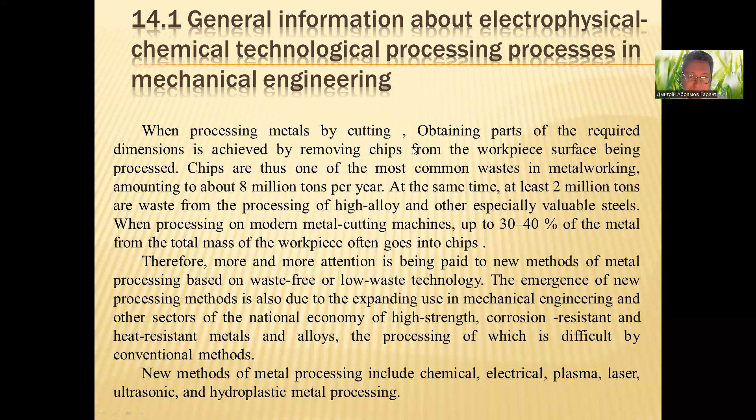A decisive role in accelerating technical progress in mechanical engineering belongs to new progressive technological processes that can dramatically increase labor productivity, reduce labor intensity, and increase the reliability and durability of products.

In the practice of metalworking, electrophysical and electrochemical methods are beginning to occupy one of the leading places. The share of technological operations performed by these methods in the total volume does not yet exceed 1%.

However, their use has made it possible to significantly reduce the difficulties of introducing hard alloys, facilitate the transition to the widespread use of difficult-to-process materials, including non-metallic ones, and solve a number of complex technological processes associated with the production of products from materials that have not previously been processed.

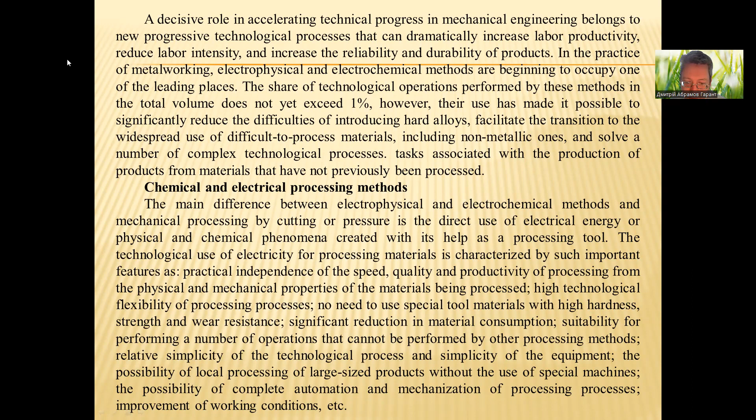Progressive processing methods can be divided into two groups. The first includes methods used to remove material from treated surfaces, transfer it, and shape it using electrical energy introduced directly into the treatment area. These are electroerosive, electric spark, electric pulse, electric contact, anodic mechanical processing, and electrochemical methods.

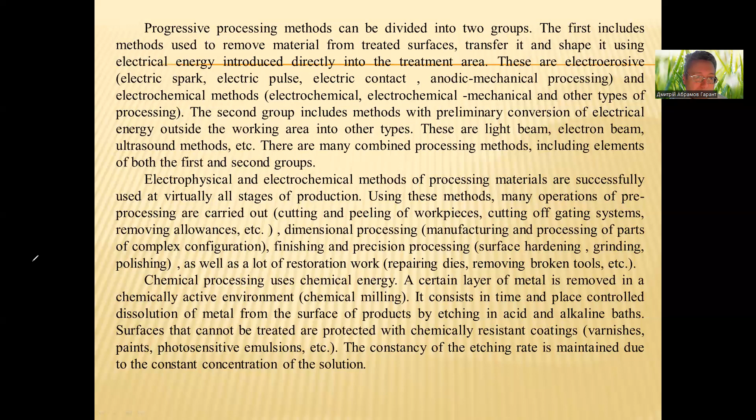Using chemical processing methods, local thinning is obtained on non-rigid workpieces, stiffening ribs, winding grooves, and crevices, waffle surfaces, and surfaces that are difficult to reach with cutting tools.

With the electrical method, electrical energy is converted into thermal, chemical, and other types of energy directly in the process of removing a given layer. In accordance with this, electrical processing methods are divided into electrochemical, electroerosive, electrothermal, and electromechanical.

Electrical processing methods: first, electrochemical processing, is based on the laws of anodic dissolution of metal during electrolysis. When a direct electric current passes through the electrolyte, a chemical reaction occurs on the surface of the workpiece, which is connected to the electrical circuit and serves as the anode, and compounds are formed that go into solution or are easily removed mechanically.

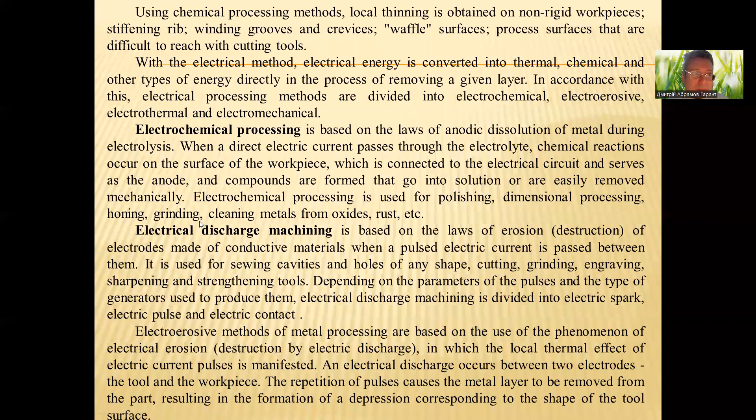Electric spark machining of metals is used for processing hardened steels and hard alloys, drilling holes of small diameters in millimeters, production of profile narrow grooves and groove-shaped internal cavities in dies, molds, and cutting tools, blind holes in taps and removal of drills after breakage from expensive parts, cutting workpieces, etc.

The process is carried out on special machines, as shown in figure 14.1. You can see the scheme of electric spark processing of metals. The special machine is equipped with electric current pulse generators.

The pulse generator consists of a direct current generator G, resistance K, and capacitor C, and contains this capacitor C.

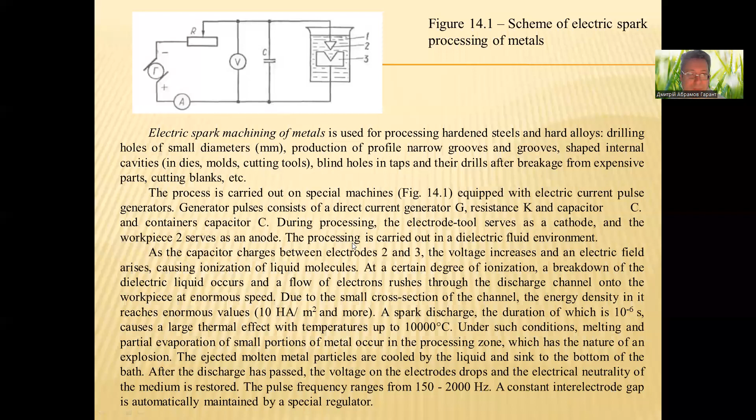Tool electrodes are made of copper, brass, cast iron, aluminum, and in some cases tungsten. Mineral oil, kerosene, distilled water, and other dielectric liquids are used as dielectric fluids. Accuracy during electrical discharge machining of holes reaches plus minus 0.01 millimeters. Surface roughness is 6-7 classes.

The disadvantages of the electric spark method include relatively low productivity - when processing steel, metal removal reaches 0.8-0.9 centimeters cubed per minute - and high energy intensity, 36 to 252 megajoules, 10 to 70 kilowatt-hours per 1 kilogram of removed metal, and high consumption of electrodes. The use of electrodes made of graphite and copper-tungsten compositions results in a significant reduction in electrode consumption and an increase in productivity.

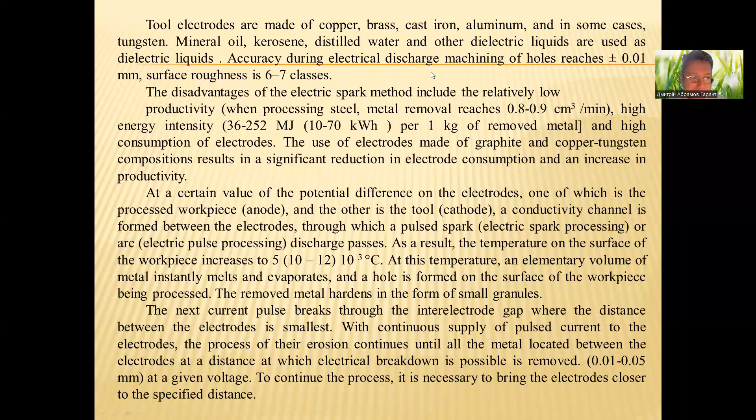With continuous supply of pulsed current to the electrodes, the process of erosion continues until all the metal located between the electrodes at a distance at which electrical breakdown is possible - 0.01 to 0.05 millimeters at a given voltage - is removed. To continue the process, it is necessary to bring the electrodes closer to the specified distance. This is done automatically using a tracking device of one type or another.

Electric spark processing is used for the manufacture of stamps, molds, dies, cutting tools, parts of internal combustion engines, meshes, and to strengthen the surface layer of parts.

Electric pulse processing is used as a preliminary treatment for dies, turbine blades, and surfaces of shaped holes in parts made of heat-resistant steels. With electric pulse processing, the metal removal rate is 8-10 times higher than with electric spark processing.

The electric pulse methods of metal processing arose from the improvement of the electric spark method. When processing with this method, the part is connected to the negative pole of the power source, and the tool is connected to the positive pole. The main influence on the treated surfaces is exerted by positively charged ions.

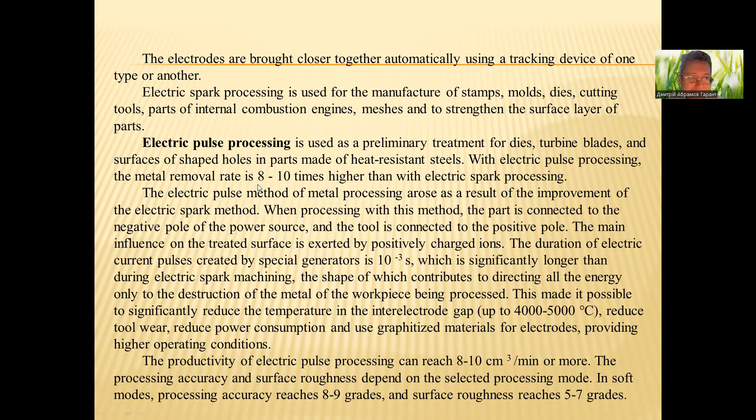It is advisable to use electric pulse processing when simultaneously removing metal from relatively large areas in black processing, since in this case the productivity of the process sharply increases.

Providing translation or rotation motion to the electrodes during electric spark and electric pulse processing makes it possible to reduce the manufacturing time of parts by 1.5-2 times, due to an increase in lateral clearances and easier evacuation of erosion products from the inter-electrode clearance.

Recently, high-frequency electric pulse processing has become widespread. It allows you to process parts to class 9 surface roughness with a productivity 30 to 50 times greater, which exceeds the productivity of the finishing modes of the electric spark method.

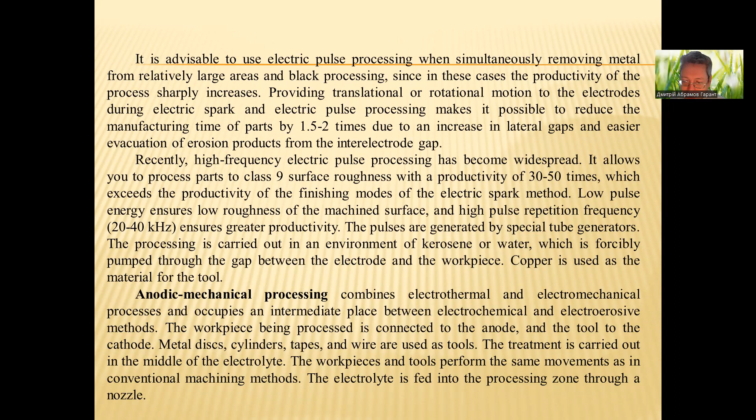Metal discs, cylinders, tapes, and wire are used as tools. The treatment is carried out in the medium of the electrolyte. The workpiece and tool perform the same movements as in conventional machining methods. The electrolyte is fed into the processing zone through a nozzle.

When a direct electric current is passed through the electrolyte solution, the process of anodic dissolution of the metal occurs as electrochemical processing. When the tool, the cathode, touches the micro roughness of the workpiece surface being processed, the anode, the process of electrical erosion, characteristic of electric spark machining, occurs.

Products of electrical erosion and anodic dissolution are removed from the processing zone when the tool and workpiece move. The process of anodic mechanical processing of metals is based on electrochemical and electrical erosion destruction of metal. It is used for cutting hard materials, sharpening carbide cutters, cutting shaped grooves, grinding flat and cylindrical surfaces, etc.

The anodic mechanical treatment scheme is similar to the electrical contact scheme. The process is carried out in an electrolyte environment, an aqueous solution of liquid glass or salts.

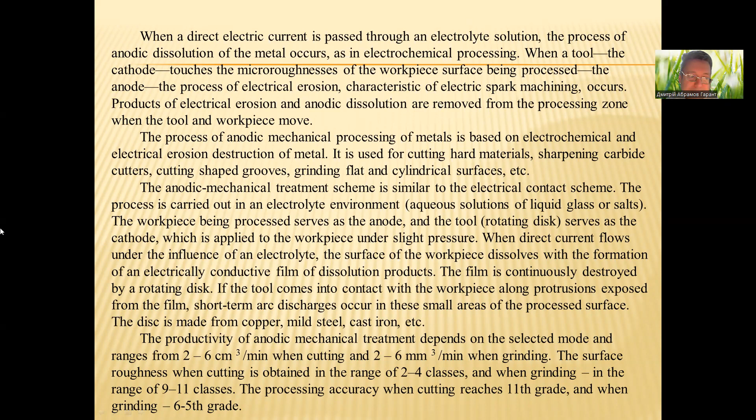Next type of processing, electrical contact processing of metals, consists in the fact that when the electrode tool is quickly moved, rotated relative to the workpiece being processed, connected to an alternating or direct current source, short-term arc discharges are formed at the moments of contact. As a result, the surface layer of metal is heated, melted, and removed by a rotating tool.

The process is carried out in an environment of mineral oil, water, or air at a voltage of from 2 to 20 volts and slight pressure from one electrode to another.

The electric contact method is effective when performing rough operations, cutting, stripping castings, descaling, etc. It provides processing accuracy of 11-12 grades and surface roughness of 1-2 grades. A steel disc is used as a tool for peeling and cutting, and a metal brush is used for cleaning.

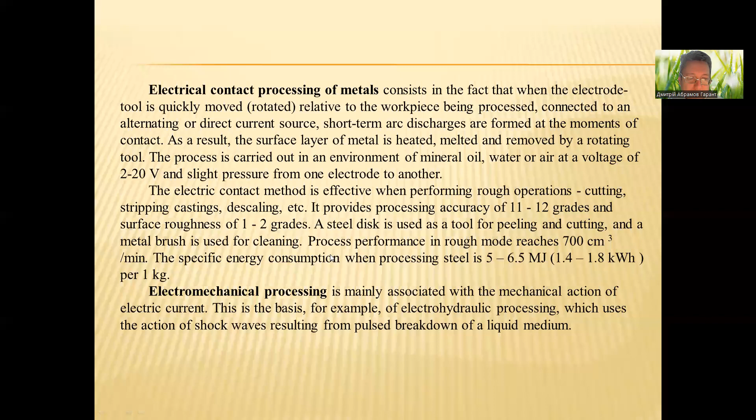Hydroplastic processing of metals: the production of metal hollow parts with a smooth surface and small tolerances. Hydraulic power cylinders, plungers, housings for electric motors, carriage axles, some gears, is increasingly being done in recent years, not by removing chips, but using so-called hydroplastic processing.

A hollow cylindrical blank or workpiece, heated to the temperature of plastic deformation, is placed in a massive split matrix made according to the shape of the part being processed, and water is pumped under pressure. The workpiece or blank is distributed and takes the form of the matrix.

To manufacture, for example, a carriage axle, a pressure of 150 megapascal is required. Therefore, the analyzed method does not allow the production of parts of significant size, for example, pipes.

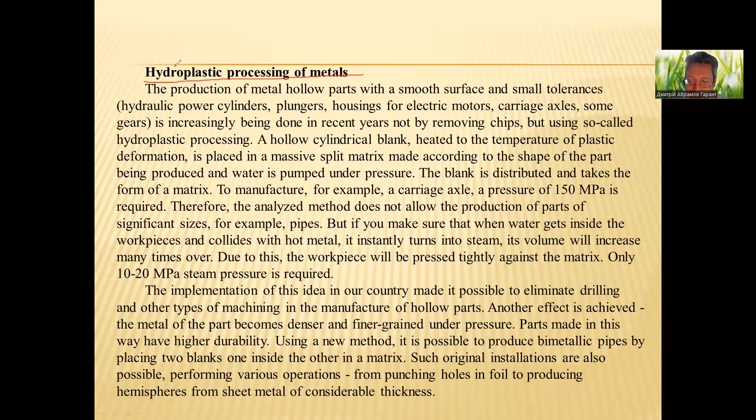Parts made in this way have higher durability. Using this new method, it is possible to produce bimetallic pipes by placing two blanks, one inside the other, in a matrix. Such original installations are also possible, performing various operations from punching holes in foil to production of hemispheres from sheet metal of considerable thickness.

Ultrasonic processing of metals, a type of mechanical processing, is based on the destruction of the material being processed by abrasive grains under the impact of an oscillating tool with an ultrasonic frequency. The energy source is electrosonic current generators with a frequency of 16-30 kHz.

The working tool, the punch, is fixed on the waveguide of the current generator. A workpiece is placed under the punch and a suspension consisting of water and abrasive material enters the processing zone.

The processing process consists of a tool oscillating at an ultrasonic frequency that strikes abrasive grains lying on the surface being processed, which chip off particles of the workpiece material.

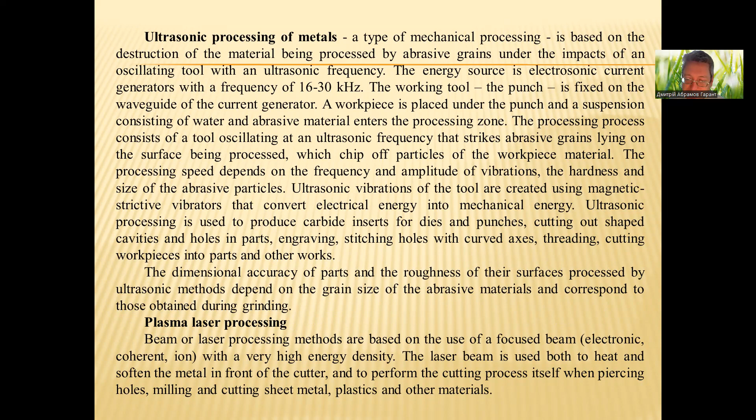The laser beam is used both to heat and soften the metal in front of the cutter and to perform the cutting process itself when piercing holes, milling and cutting sheet metal, plastics and other materials. The cutting process occurs without the formation of chips, and the metal that evaporates due to high temperature is removed with compressed air.

Nowadays, lasers are used for welding, surfacing, and cutting in cases where increased demands are placed on the quality of this operation.

For example, super hard alloys, titanium panels in rocket science, sheet and panel aluminum composite materials, nylon products and wood are cut with a laser beam by burning or evaporation. The high energy density in the heating zone creates an additional effect of cleaning the metal.

It should be noted that lasers have a relatively low efficiency due to the conversion of electrical energy into thermal energy and then into mechanical energy.

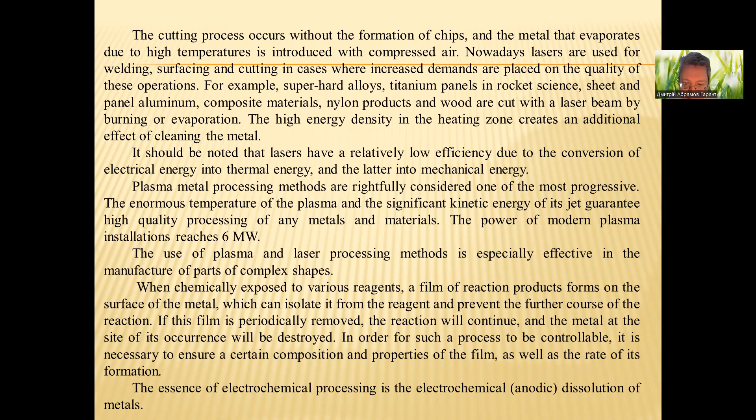The essence of electrochemical processing is the electrochemical anodic dissolution of metals.

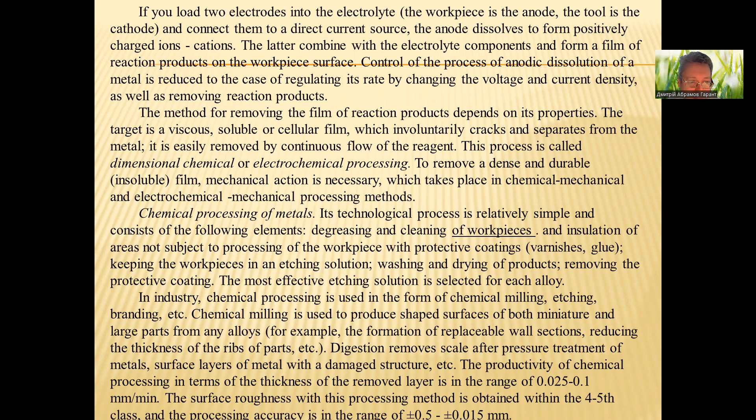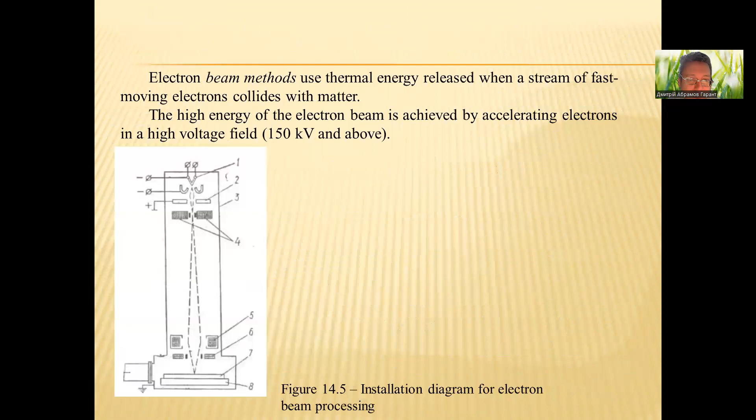Next, beam and ultrasonic methods of materials processing. Electron beam methods use the thermal energy released when a stream of fast-moving electrons collides with matter. The high energy of the electron beams is achieved by accelerating electrons in a high voltage field.

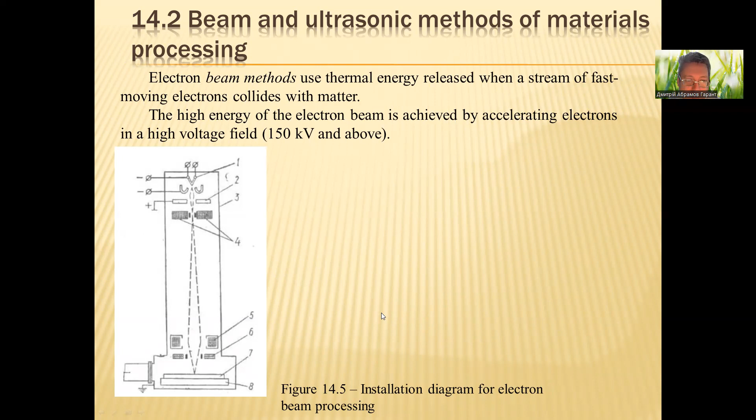As shown in figure 14.5, the installation diagram for electron beam processing, precision dimensional processing with an electron beam is carried out in a special installation. All functional systems of the installation are contained in chamber 3, where a vacuum of 0.1333 micropascal is maintained. The source of free electrons is a hot tungsten filament cathode.

Under the influence of the high voltage electric field created by anode 2, the electron beam acquires high speed and rushes to the workpiece 7, installed on the movable table 5. Focusing the electron beam into a narrow beam and controlling the trajectory of its movements are carried out using electromagnetic lenses 4, 5, 6, which have independent power sources.

The cross-section of the focused beam can reach 10 square micrometers, which ensures a high specific energy density. Using a special generator, energy is supplied in pulses with a frequency of from 50 to 5000 Hz and a duration of 100 or 1 microseconds.

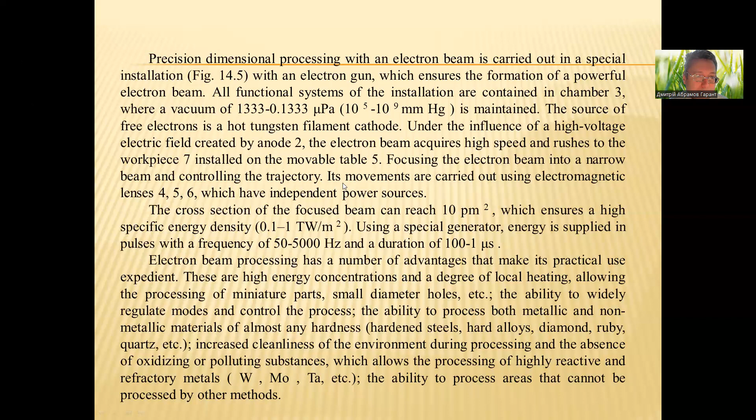Processing with a light beam is carried out using a beam generated and emitted by an optical quantum generator, a laser. A laser is a physical device that emits coherent monochromatic light in the form of a highly focused beam with a high energy density. The principle of its operation is as follows.

If, with the help of an external energy source, atoms of a substance are transferred to an excited state, then upon transition to one of the lower energy levels, they will emit light quanta. Such a change in the energy state of atoms under normal conditions, for example in incandescent lamps, occurs involuntarily. Each atom emits light independently of the others at some random moment, not coherently, resulting in a wide spectrum of non-monochromatic radiation propagating in all directions from the source.

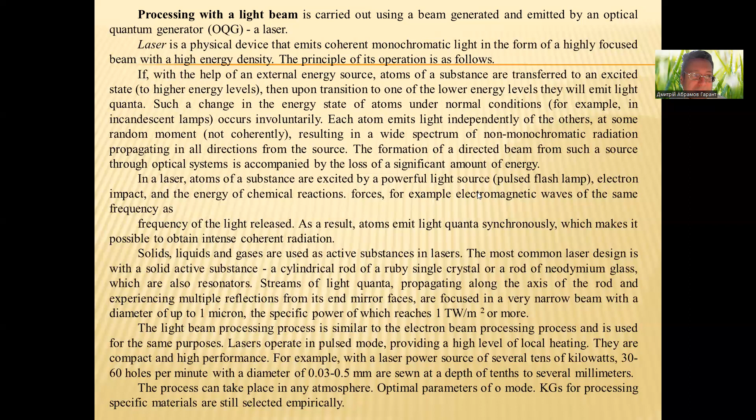The alternating current of ultrasonic frequency produced by generator 1 enters the excitation coil 2 of the magnetostrictive rod 3. An alternating magnetic field of the same frequency is created in the coil. Under the influence of this field, the rod vibrates, and its vibration, with a frequency of 15-30 kHz and an amplitude of 20-60 micrometers, is transmitted to tool 4, into the processing zone, into the clearance between the end of the tool and the workpiece 5. Liquid, water or oil, with abrasive particles suspended in it, is supplied through a nozzle 6 from a centrifugal pump.

Cutting occurs due to a large number of directed micro-impacts of abrasive particles on the surface of the workpiece, causing chipping of small particles of material.

The tool installation for ultrasonic processing is made of structural steel 40, 45, and 50. Its shape and cross-section determine the profile of the cavity being processed. Boron carbide or silicon carbide with a grain size of 3-10 is used as an abrasive.

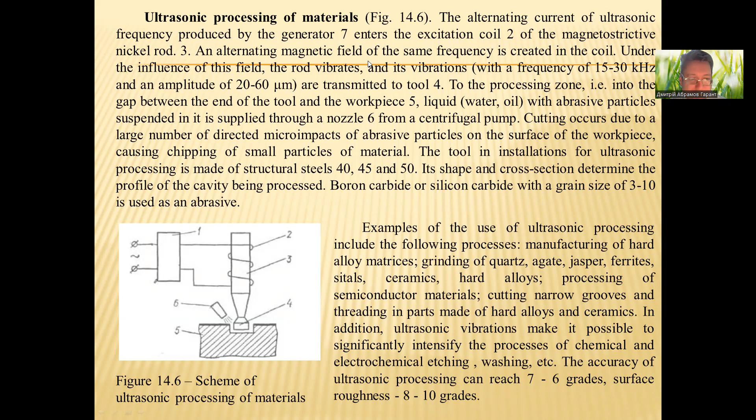And we start item 14.3: Efficiency of new methods of metal processing.

New methods of metal processing bring the technology of manufacturing parts to a higher level compared to traditional technology. This is the most effective technology, most often non-waste. General advantages of new processing methods: no need for special tool materials of high hardness, practical independence of productivity from the rigidity and other properties of the material being processed, reduction of the required force impact on the workpiece during processing, with the exception of hydroplastic processing, simplicity of machine design, and ease of automation of the processing process, etc.

Thus, labor productivity during ultrasonic processing compared to traditional cutting methods increases by 10-20 times when making non-circular holes, and 2-3 times when making round ones. At the same time, material savings range from 20 to 50%.

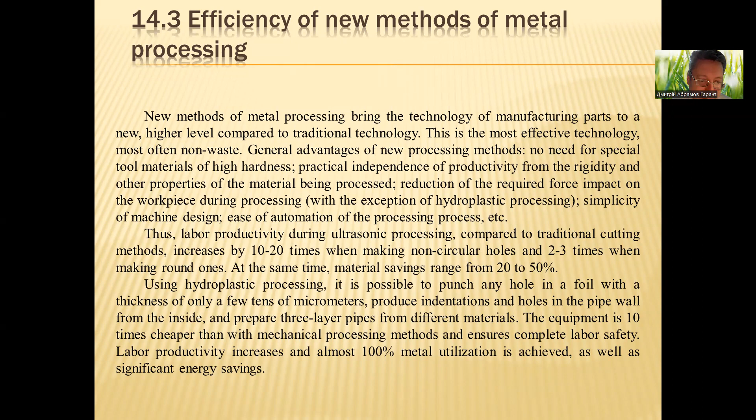Program-controlled electric spark machines can be successfully used in the manufacture of parts for televisions, cars, aircraft, and other engines. The processing accuracy on them is ±1 micron. The introduction of equipment for plasma cutting and mechanical processing of parts helped to increase labor productivity by 5-10 times.

The laser beam can scan the surface of parts that have extremely complex shapes, such as gas turbine blades, and perform its processing. This ensures a cutting speed of up to 8 meters per minute when processing products made of carbon and corrosion-resistant steel, titanium, and special alloys. Similar results are achieved using other new processing methods.

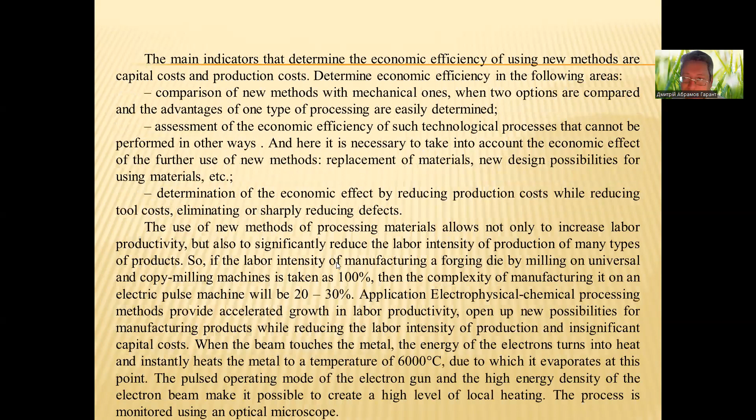And the last item of our lecture, item 14.4: technical and economic characteristics of the use of new methods of processing materials. The main indicators that determine the economic efficiency of using new methods are capital costs and production costs.

Determine economic efficiency in the following areas: comparison of new methods with mechanical ones, when two options are compared and the advantages of one type of processing are easily determined; assessment of the economic efficiency of such technological processes that cannot be performed in other ways, where it is necessary to take into account the economic effect of the further use of new methods, replacement of materials, new design possibilities for using materials, etc.; and determination of the economic effects by reducing production costs while reducing tool costs, eliminating or sharply reducing defects.